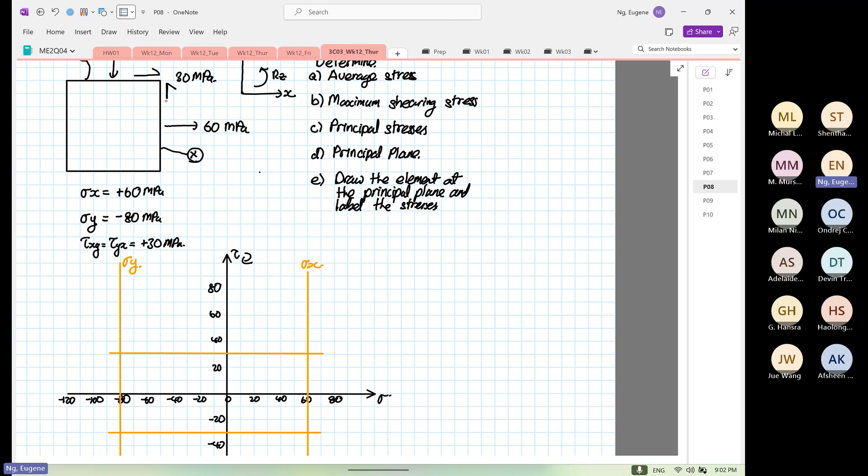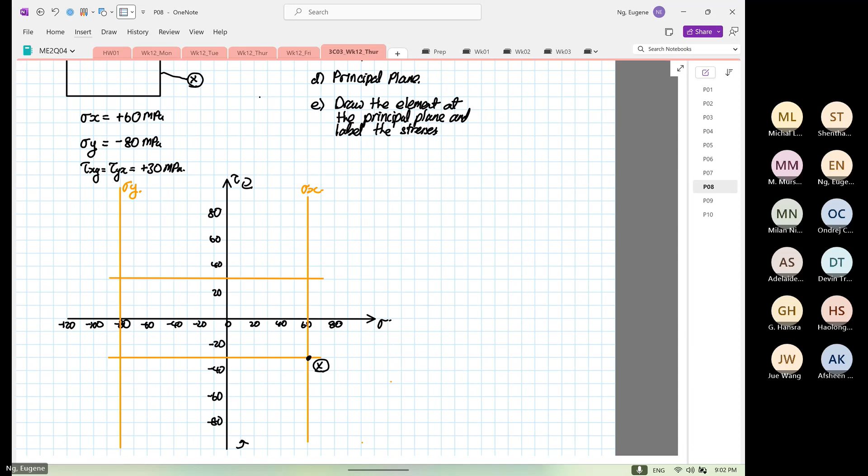Point X will lie on this line, yes or no? Right? So it's either it will intersect the bottom where the shear stress is, or at the top. If you look at point X over here, that 30 over there acting at point X surface, the element will rotate clockwise or anti-clockwise? Anti-clockwise, yes or no? You look at this 30 over here, right? This line over here will rotate which way? Anti-clockwise. So anti-clockwise is top or bottom? Bottom. Okay. Then the one at the top.

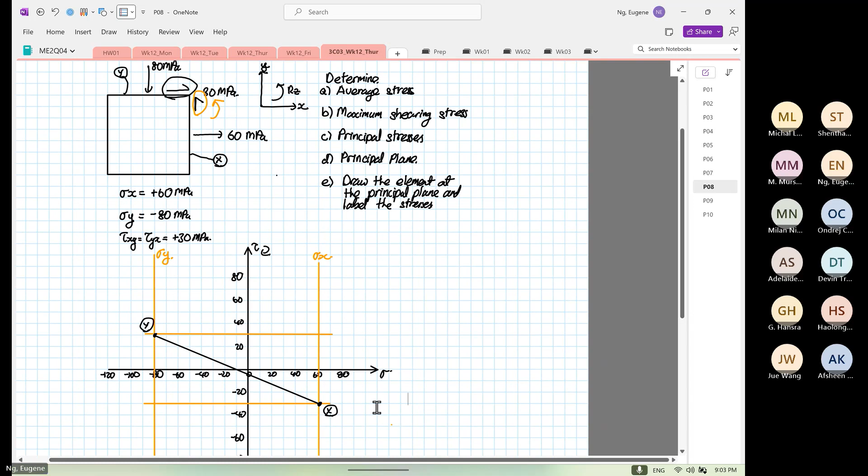Now we look at the Y line. Okay, so this is the Y line. The element is going to rotate in which direction, based on this one? Clockwise, right? So clockwise, this will be at the top. So this is your Y. So from here, you can construct a straight line. And likewise, you can do very straightforward calculation.

So the first thing that you calculate is known as center of circle. So center of circle is also known as your what? Stress average. So stress average is equal to stress X plus stress Y. Average, yes or no? So it's plus, okay? So this is equal to 60 plus minus 80 divided by 2. Remember, stresses are vector dependent. Don't forget about the what? The sign. So this will be equal to minus 10 megapascal. So when you construct, it's at your minus 10 line. So I'm going to use green. So this point, immediately label as your point O. Okay, at your point O.

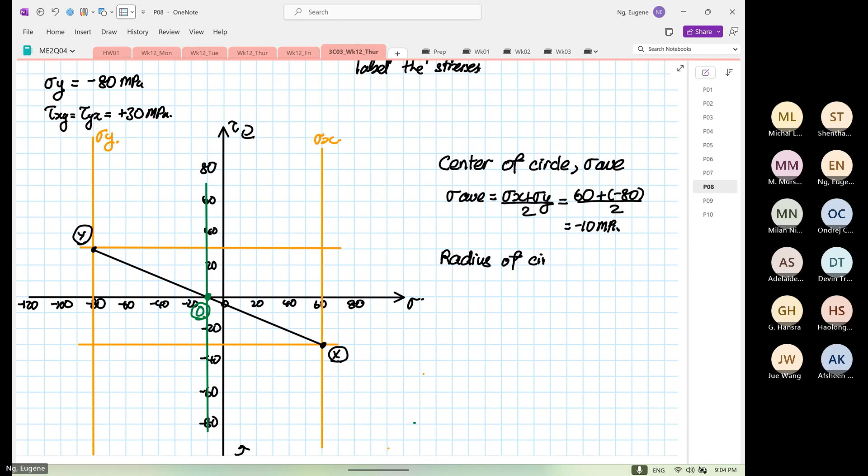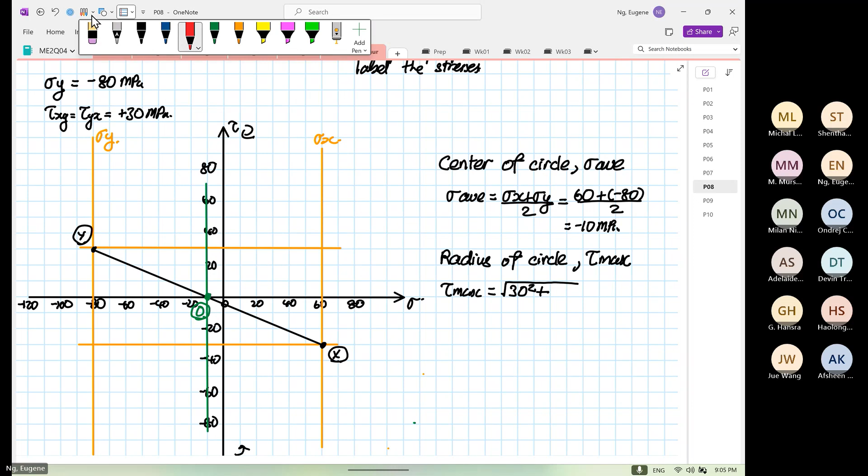Next thing that we can calculate almost immediately is the radius of circle. And the radius of the circle is known as your what? Tau max. Okay. So tau max is equal to your shearing stress. Your shearing stress is equal to 30 squared plus the distance from here to here. So where did we get the 30 from? Okay. The 30 we got is the distance from here to here.

Hey, come on, Eugene, seriously?

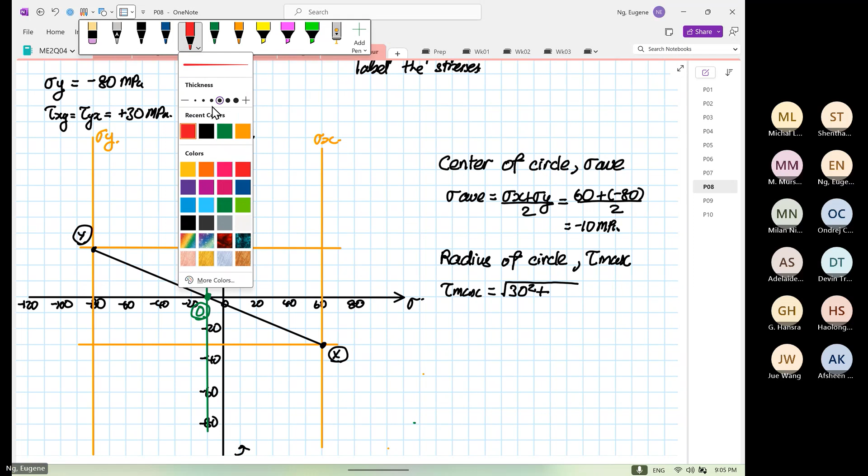The 30 that we get is the distance from where? From here to here. This is your 30. And then the other length that we need to know is the distance from your stress Y to the where? Stress average. Okay, so this is 20, 40, 60, this is equal to 70. Not to the zero as in the origin, to the center of the circle, right? So 20, 40, 60, 70. So it's 70 squared.

Nothing to memorize. It's high school, not even high school. Okay, so 30 squared plus 70 squared, square root of the whole thing is 76.157. 76.157 megapascal. Right? So what we have calculated is this distance over here. Let me use a different color to elaborate. What we have calculated is the distance from here to here. And over here, this is our radius. We clear? Okay.

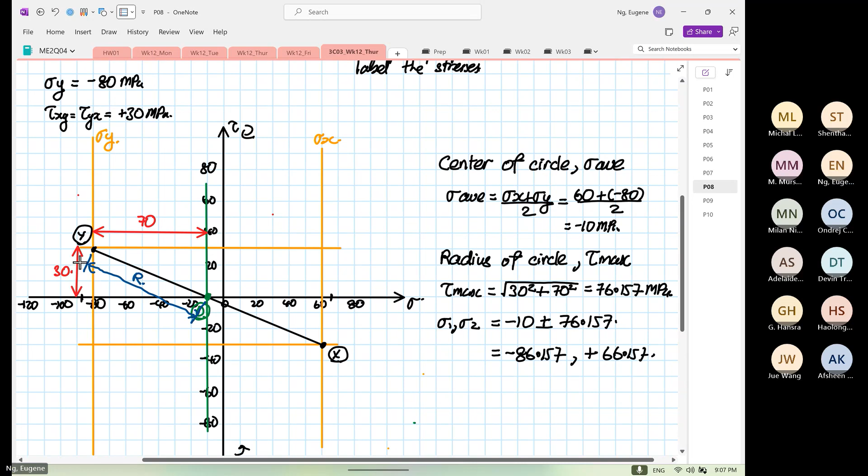Oh, this is real stupid. The software is like, oh no, it can be the user. Yeah, this is as good as I can get. Yeah.

Straightforward. That is your Mohr circle. Okay, so we have calculated the principal stresses, we have calculated the tau max, and we have calculated the average. Next, we are going to calculate the orientation of the principal stresses. So we know that this is our stress 2, okay? This is your what? Stress 1, okay? So what we want to calculate over here is this orientation, and this is known as 2 theta P. P is the orientation of your principal plane.

And this orientation is very critical for the orientation of your carbon fiber reinforced plastic, how your fiber should be aligned. Now, if we come back and look at carbon fiber, if you orientate your carbon fiber in this direction, what happens? It will see shear stress. And carbon fiber, they hate what? Shear stress. So we have to find this angle over here, the 2 theta P, because we need to know at what orientation this is equal to 0 shearing stress. Carbon fiber love what? 0 shearing stress. There you go. Okay. So from here,

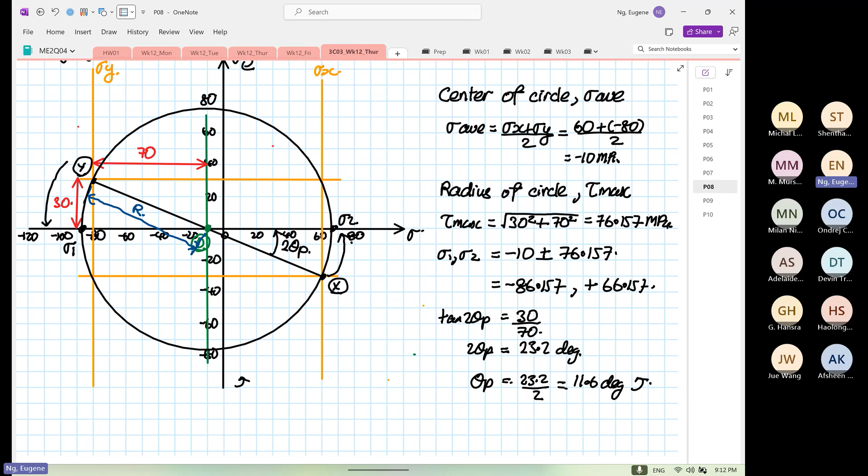So, what does this actually mean? So now I'm going to teach you from Mohr circle. Now, Mohr circle is like your calculator. It's like the number that you see. What you do with the number in real life is a different thing. Yes or no? So now we are going to bring it back to the real world. So how do we bring it back to the real world? Now we have to construct from Mohr circle, go back to the element. Okay. How do we do that? So now we draw the axis. Okay.

So this is our original x-axis, and then we have our original y-axis. Okay. Now we are going back to the element. So now, in the real world, we will rotate by how many degrees? 11.6 degrees anti-clockwise from the horizontal axis or from the vertical axis. And you all understand why we only rotate by theta p now? In Mohr's circle it is 2 theta p; in the real world it is theta p. So now we're going to rotate it anti-clockwise by 11.6 degrees.

Oh, poor fishy, don't run away.

So anti-clockwise, 11.6 degrees. Yeah, I'm still old school, man. And I put the tape down here so it will not... So 11.6 degrees. Sorry, I'm still very old school, okay? So 11.6 degrees. It can only draw 11.

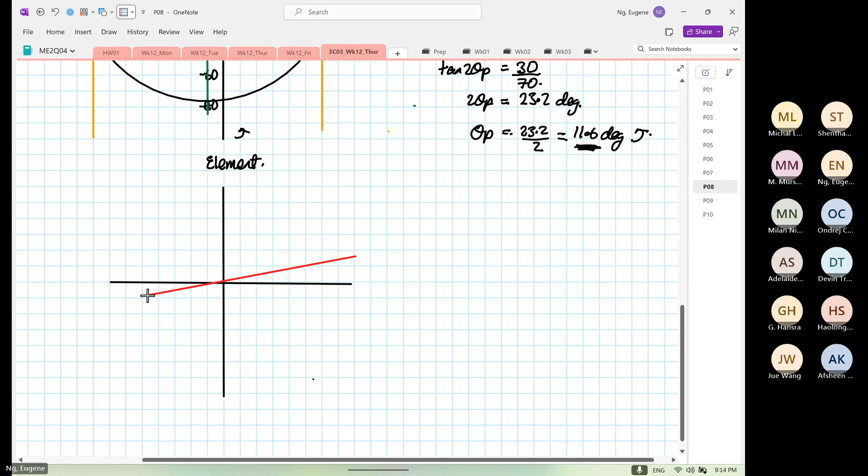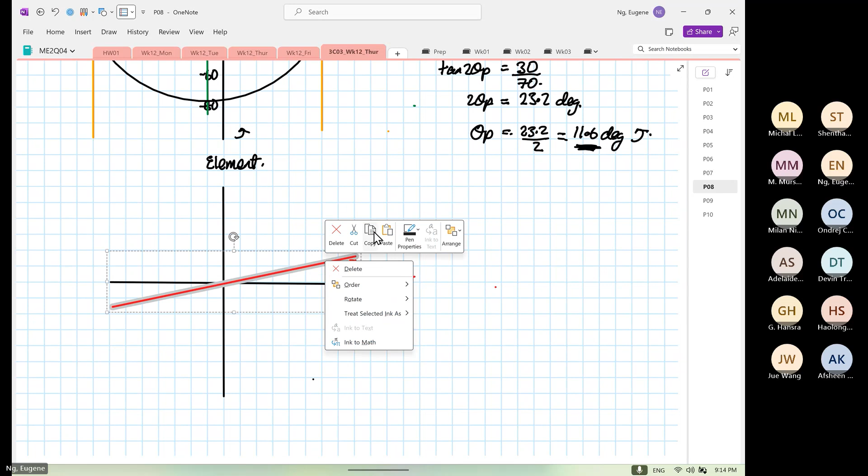Okay. So now this has been rotated by 11.6 degrees. So I do this, copy, paste, rotate by 90 degrees. Here we go. Okay, so now we have this. So now I'm going to draw the box, the red box, tilted at 11.6 degrees. I'm going to use green to show that on this vertical surface, this is in fact my X. My horizontal, this is actually my Y.

Now I finish copying. I want you to stop and listen to me, because now we are going from the Mohr's circle back to the element. Okay, watch it. Point X is point X over here. And then it rotates by 2 theta p. What's the magnitude? 66.157. In what direction? Anti-clockwise. So X rotates anti-clockwise and you touch this line by theta p. So that stress you see over there is tensile, and this stress is 66.157.

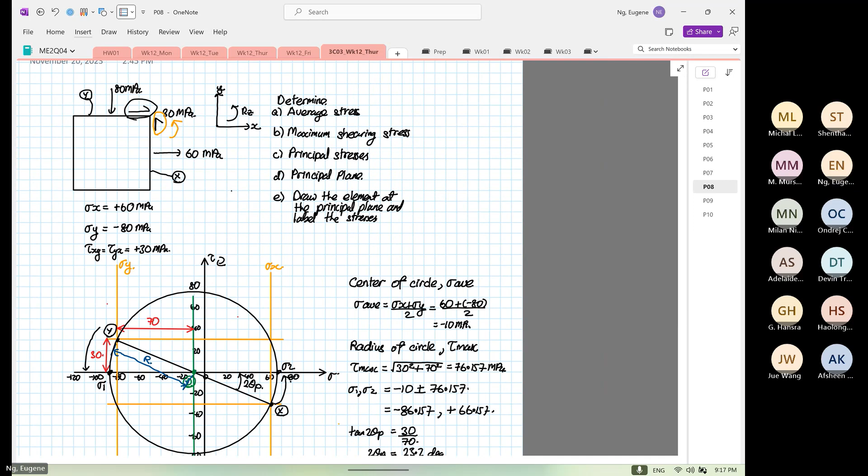Simple? Not difficult. So now, what do we learn? We learn from the element to the Mohr's circle. Then from the Mohr's circle, bring it back to the element. Why do we have to bring it back to the element? Because this is where real life is. Mohr's circle is just an analysis tool. No point only knowing how to analyze and not knowing how to apply. Absolute waste of time, waste of money.

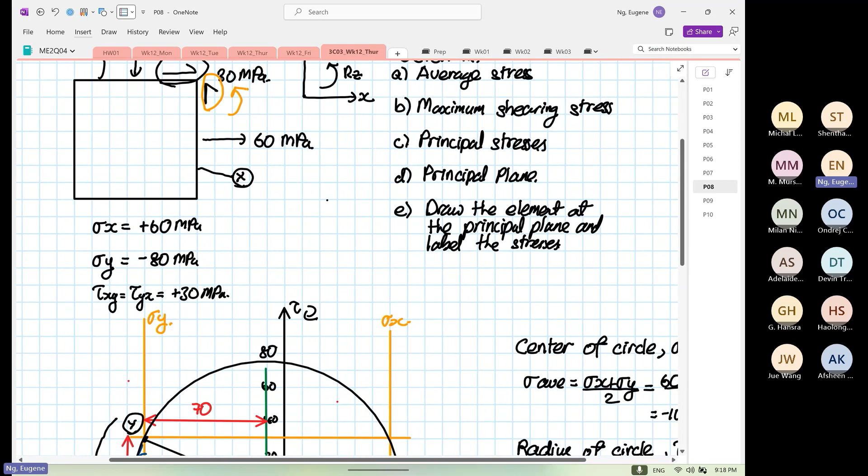So now, what does it mean? I.e., if I were to look at this structure, I'm going to lay my carbon fiber now. My first laying direction is this direction. So the first lay direction relative to the object is 11.6 degrees. At this plane, the shear stress is equal to what? So, the strength of the carbon fiber reinforced plastic, and you look at the software. Are we clear? Like this. Okay.

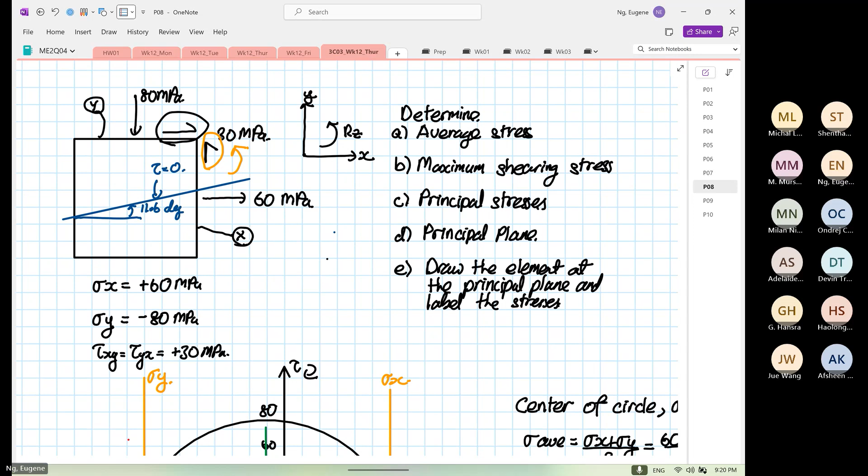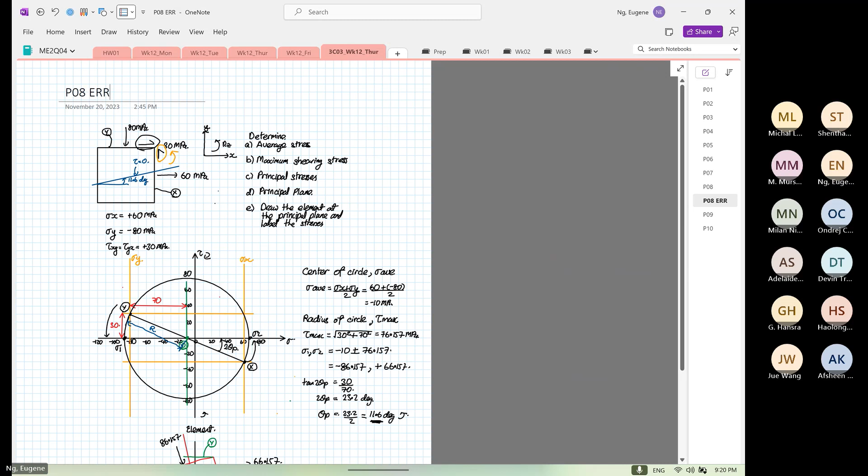Okay, now I will do a demonstration. What if we screw up the shear stress? Let's say you know nothing about shear stress, like me when I was young. So I'm going to copy the page and paste. I'm going to call page 8 error. So what if you screw up the orientation? This is not the correct orientation, but you label wrongly: this is your point X and this is your point Y. This is wrong, by the way.

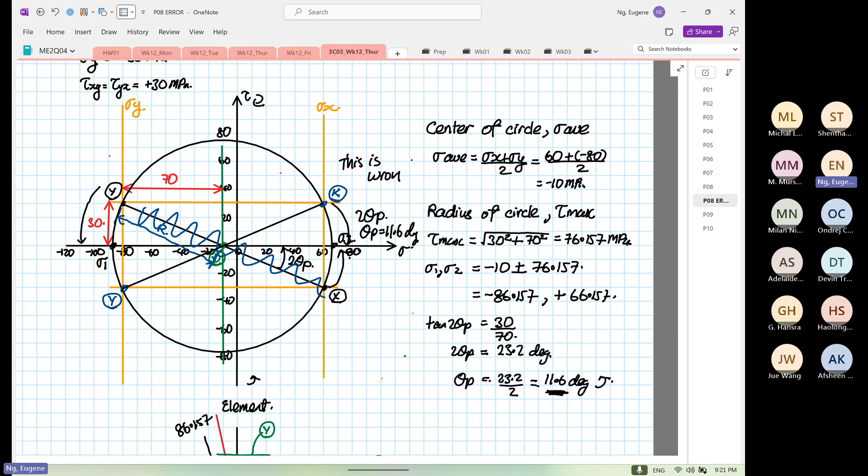So when you use the wrong one, you draw your straight line. Because of the error, you are going to orientate this by 2 theta p, and theta p is 11.6 degrees. Wrong. Then you are going to orientate your carbon fiber not in this direction, but in this direction now, rotating 11.6 degrees based on this angle. So what happened? Wrong. A smart student can also get the wrong thing. Especially for carbon fiber, this is really critical.

If you were to design with steel or aluminum, it does not matter. Why does it not matter? Anyone? Because the material is isotropic, homogeneous in every direction. Carbon fiber is not. That's why the software to design this is so expensive. So you have to be precise. Get it wrong, and it's a complete waste of time and money.